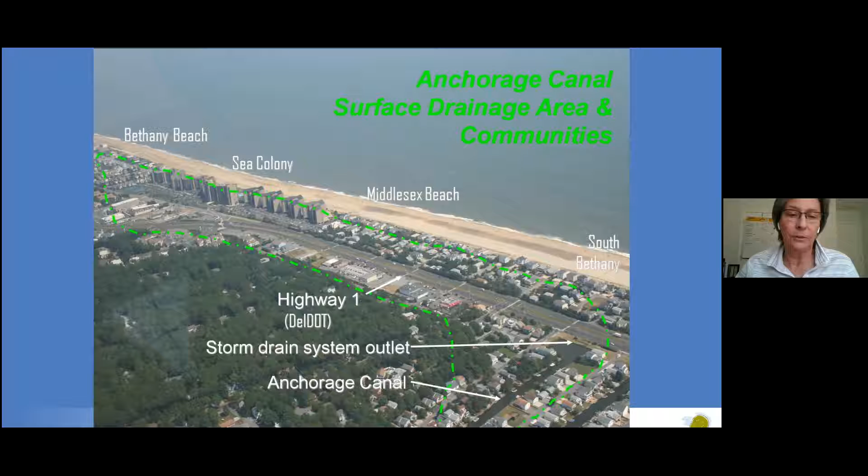This plan included concept designs, cost estimates, nutrient load reductions, and so forth for a variety of different projects all along the highway and within the community in that drainage area. It included things like wet swales along the sides of the highways, infiltration basins in some of the parking areas, bioretention facilities in the medians and along some of the other right-of-way areas.

We started implementing this plan with our partners in 2011. The plan was completed in 2010, and we started applying for grants right away to do the project. From 2011 through this year, 2020, we have managed to implement all of these projects. This was really our first great success in doing this planning, and it was successful because we had proposal-ready projects that could easily be peeled out of the document and put into a funding application.

We could easily peel out portions of the project that fit the funding level that we were applying for. DelDOT was a really important partner in all of this, not only in developing the plan, but definitely in implementing the projects along the state right-of-way.

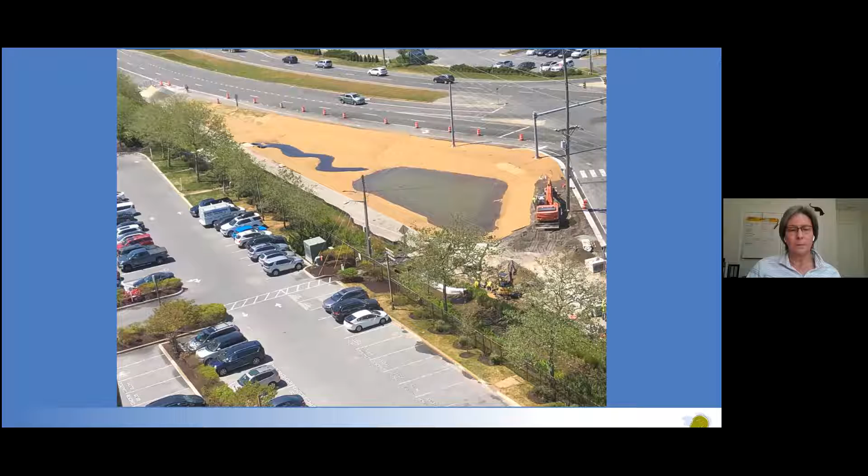The next plan I wanted to talk about is the Living Shoreline Siting and Concept Plan. This was done with Doug Janiec, Sovereign Consulting. Our goal was to select 6 living shoreline demonstration project sites. We used a multi-tiered geospatial screening that Doug developed, with a lot of stakeholder input. We did field visits to some of the top candidate sites, and then Doug helped us develop conceptual plans with cost estimates for 6 sites.

One of the lessons we learned here is that we really had to get upfront commitment from our private landowners. Some of these projects that we planned have not come to fruition because we didn't get that commitment right away. It's always been a sticking point with projects on private land, but we really learned our lesson in this one.

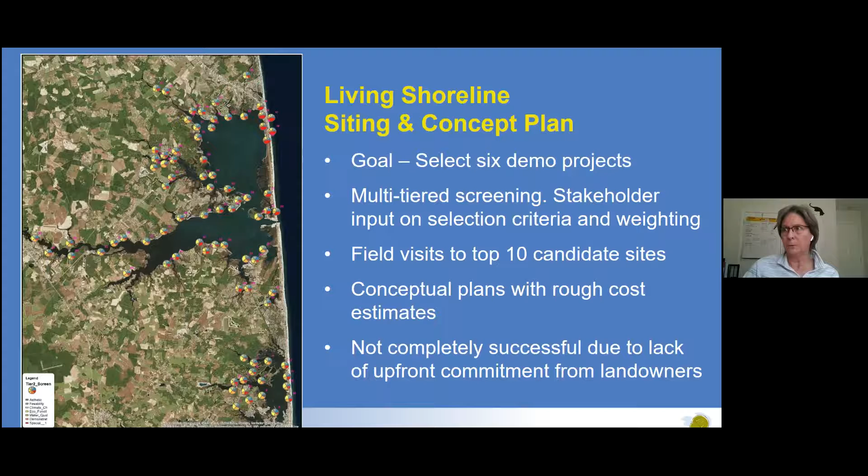Next was a stormwater master plan for the town of Dewey Beach. It's a highly vulnerable area in our watershed, a very low-lying barrier island with a lot of problems with flooding and shoreline erosion. So we helped the town develop a green infrastructure stormwater master plan that identified over 40 BMPs that were prioritized, including not only stormwater BMPs but also living shoreline projects. Again, we had concept designs, cost estimates, and environmental benefits laid out, and we had great commitment from the town on this.

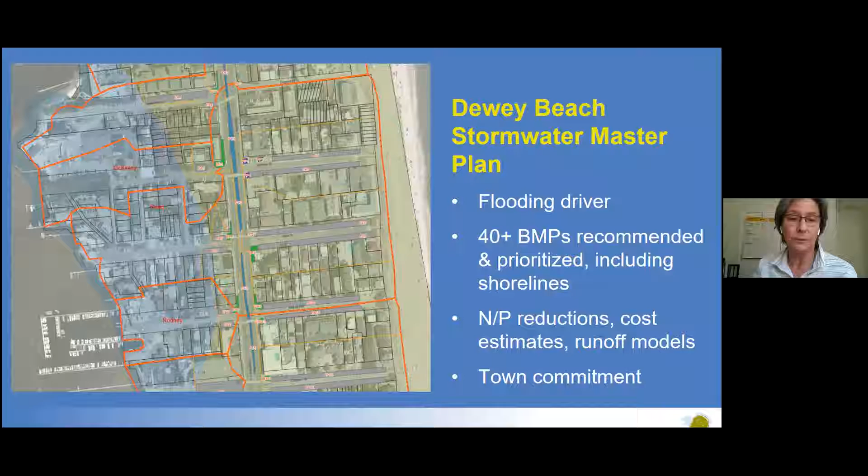This was also integrated with a planning exercise that DelDOT had grant funding for, and RK&K and Sovereign participated in this. So this helped facilitate the implementation of some of the projects in that master plan.

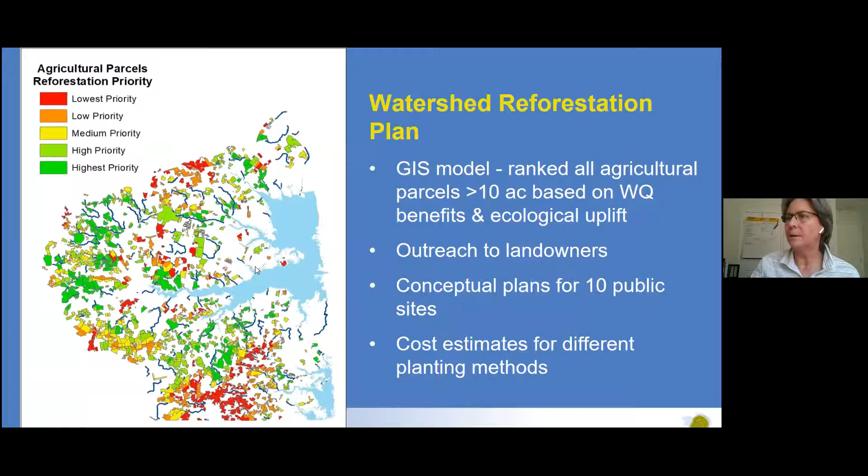I'm going to talk about this one more in my next talk, so I'm not going to spend any time on it here. This was a watershed reforestation plan that we did. I'll say more about that in a bit.

The last one I wanted to mention is a shellfish enhancement plan that we've done for the inland bays. We have very low densities of wild oyster populations in our bays, although natural recruitment does seem to be increasing recently. We have a burgeoning aquaculture industry now, just in the beginning phases. But recognizing the ecological benefits of a healthy oyster population, our goal is to increase the wild native oysters in the inland bays and provide sustainable reefs for them.

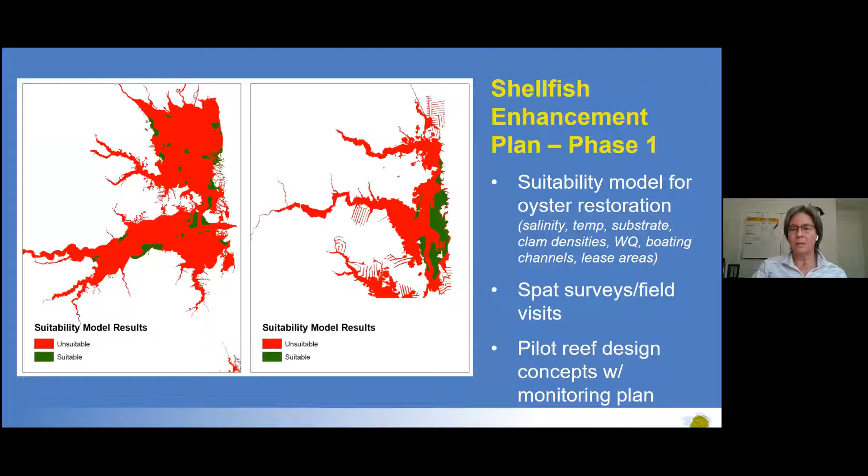So we've done this in 2 phases. The first phase did a geospatial suitability model for oyster restoration that combined a number of physical, biological, and regulatory factors to assess the suitability of all the areas within the bays for oyster reef projects. Then we started to implement some pilot projects, very small reefs that we could monitor and do research on to see what worked well, what kinds of tactics worked best in our bays, and what kinds of issues we would run up against. To date, we've implemented 3 pilot subtidal reefs, and we are currently designing and getting ready to implement some intertidal reefs as well.

One of the lessons we learned here is that although we try to do science-driven planning approaches, sometimes our planning isn't just about science, because there are lots of user conflict issues, regulatory issues, and so forth that have gone into this plan that we really have to address in future phases of the planning. Continual communication, not just in the planning effort but also about the results of some of our studies, has been really key to moving this process along.

These are some plans that we're currently using, our lessons learned, to develop at the moment. Not going to discuss these in any detail, but we definitely have a great process that we've developed for doing these planning exercises, much more efficient now.

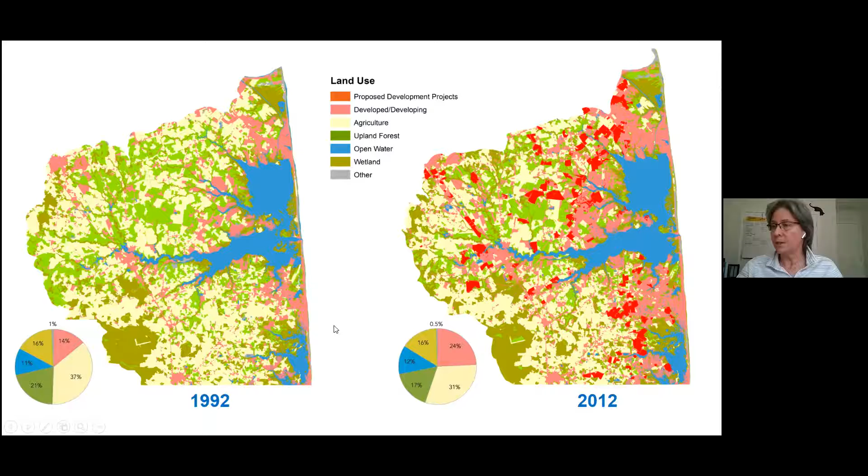So this project that I'm going to talk about is from a reforestation planning effort that we conducted in 2017, I believe. The driver behind this is that how we use the land directly affects the water quality in our bays, because various land uses produce different types and amounts of pollutants. In our watershed, agriculture, shown in the yellow areas here, is definitely the largest land use, although it is shrinking, and it's a major source of pollution to our bays.

So our last State of the Bays report, issued in 2016, we're currently updating, with a new report coming out in the fall, but I don't have the most recent data. This is data from the 2016 report, and it showed that between 1992 and 2012, developed lands in our watershed increased by 34 square miles, our agricultural land was down by over 18 square miles, and our upland forests were down by 14 square miles. So the trend in our watershed is more development and loss of forests and critical wildlife habitat, and all indicators are that this trend is continuing and will continue.

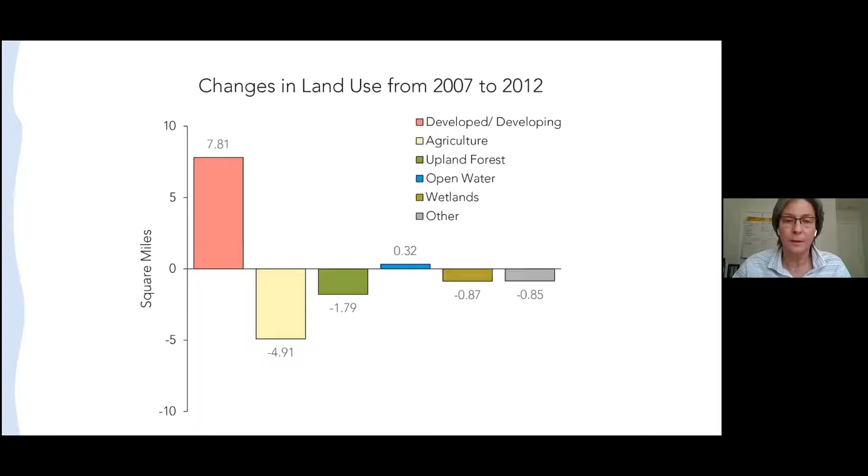So another issue that we deal with in our watershed is lack of protection and restoration efforts to counter these losses. Natural habitats support a diversity of plants and animals, and some of them are rare or becoming scarce, and these habitats are being rapidly lost or fragmented due to changes in land use in the watershed.

So we did an assessment of protection and restoration in the watershed, and found that progress on protection of natural areas has nearly stalled and slowed, and almost all of the progress that was made was before 2010. This is largely due to reductions in funding for public conservation efforts, and our watershed development is really driving land values sky high, so purchasing land for easements and so forth has become difficult.

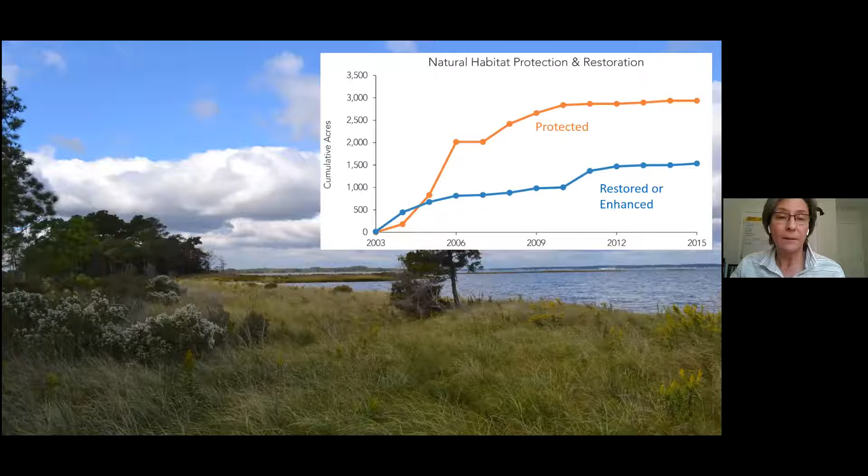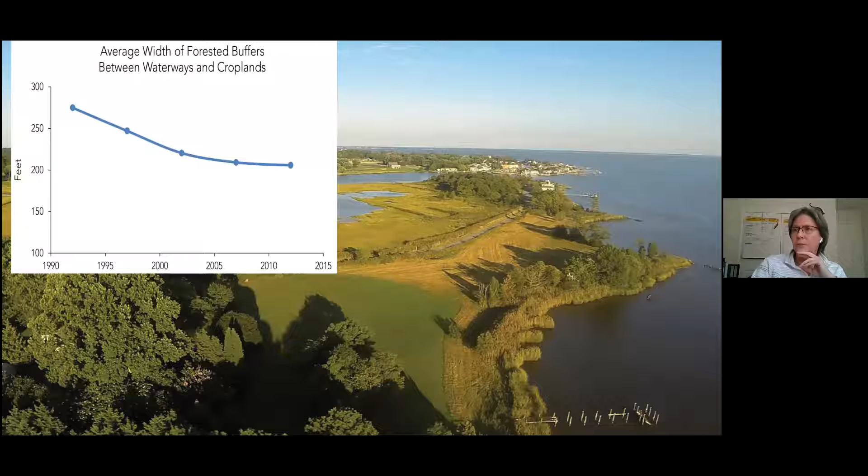Buffers of natural vegetation can intercept and remove pollutants, and they vary in effectiveness with width and type of vegetation. So we did an assessment for the last State of the Bays report of the width of forested buffers between agricultural land and our waterways. We've definitely seen a decline over the years in buffers that are 50 feet or more in width. So that is an issue.

Wildlife habitat fragmentation and loss of habitat for key wildlife species is also a key issue for us. So reforestation has become a major initiative for the Center for the Inland Bays. We're working with a variety of partners on acquisition of land and easements to do various types of restoration projects, but we're really focusing on reforestation. So these are some of our priorities: protect habitat, restore habitat, expand forested buffers to deal with pollution going into the bays, ultimately improve water quality, and connect fragmented habitats to develop more interior forest.

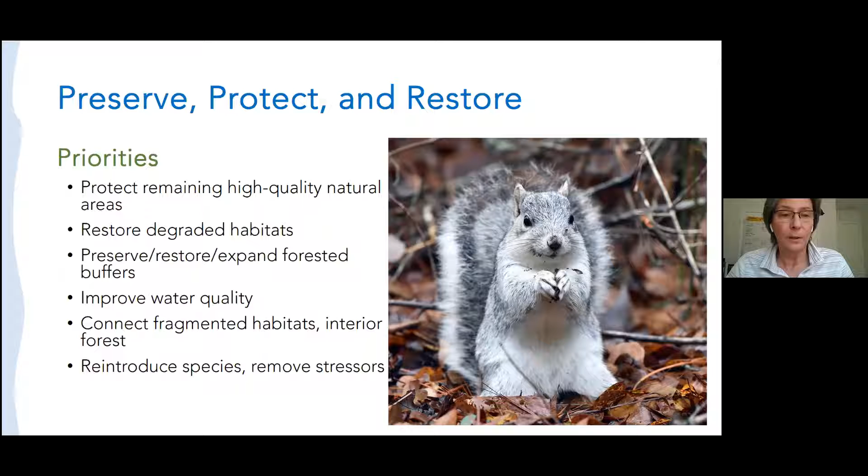So we did this watershed reforestation planning as a geospatial exercise and then outreach to landowners. Reforestation as a green infrastructure practice is actually one of the most cost-effective strategies to achieve nutrient load reductions, especially on agricultural lands, because converting cropland to a green infrastructure practice such as reforestation or wetlands results in the highest nutrient reductions for the cost in the long term. You're taking things out of fertilization and replacing them with natural vegetation.

So we partnered with the Sussex Conservation District to identify and conceptualize projects that provide water quality benefits and improve wildlife habitat. We had a geospatial model that used multiple environmental parameters to rank all agricultural parcels within the watershed that were greater than 10 acres in size.

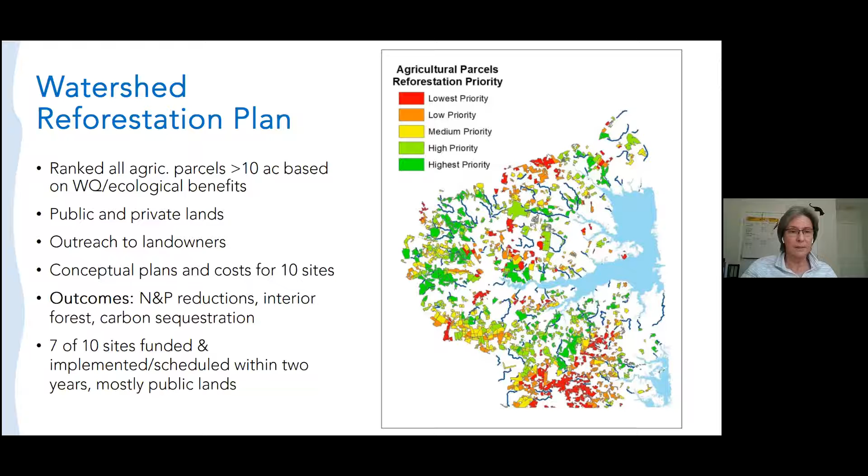Once we had these priorities established, we did outreach with the district to public and private landowners, and identified 10 parcels where we had some agreement on top priority and commitments from landowners. We developed concept plans for the planting and enumerated the outcomes—nutrient reductions, carbon sequestration, and so forth—and began working with partners to implement it. As of now, we've implemented 7 of the 10 sites in the plan, either completed the implementation or have it scheduled.

I'm going to skip over this because I think it's a little bit of a repeat of the next slide. So I wanted to switch to talking about this one specific project, Burbage Road.

This is a county-owned parcel that's been leased for agriculture over the years, but the county agreed in 2018 to take the parcel out of production and make it available for reforestation. The county's been a great partner in this reforestation effort—we've done projects on several county-owned parcels, and they're making more parcels available to us. We're going to be working with them to reforest most of the 400-acre Wolfe Neck wastewater treatment plant, turning that from agricultural spray irrigation to silviculture. The county's interest is partly in developing a nutrient credit banking system with the state, so they get additional benefit from this.

So the Burbage Road project is a 20-acre parcel. It drains directly to the Indian River Bay via, I think, Blackwater Creek.

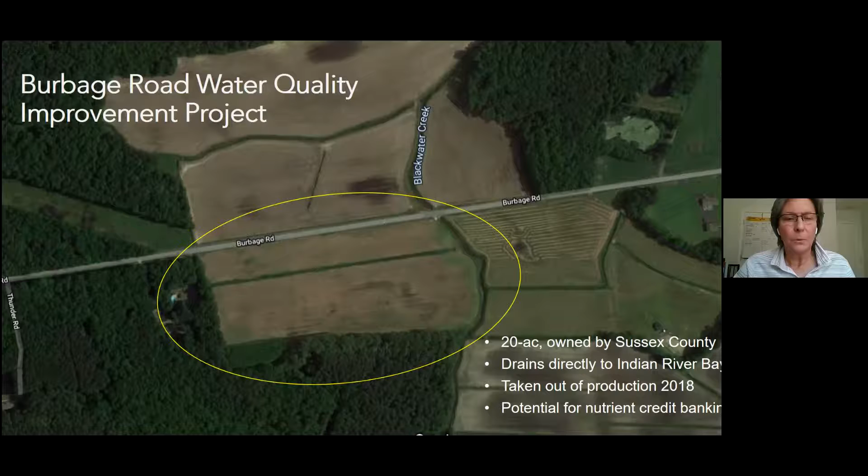Here's a picture of the project after it was implemented. As I said, Sussex County owns the project. The Conservation District helped with a lot of the earthwork involved, and Environmental Concern helped us with some wetland design. The objectives were to take those 20 acres out of production—there was a large drainage ditch going right through the center of the project that we decided would make a great wetland restoration. The Sussex Conservation District helped design and construct it, converting it to a 1.8-acre treatment wetland. Then 7 acres of the property were planted with 3,000 native trees.

Here's an aerial view of it. This is the drainage ditch that went through the parcel, and the wetlands were created back here next to the woods and along the drainage area. Much of the rest of it was planted for reforestation, and all of it drains to this ditch here on the right-hand side.

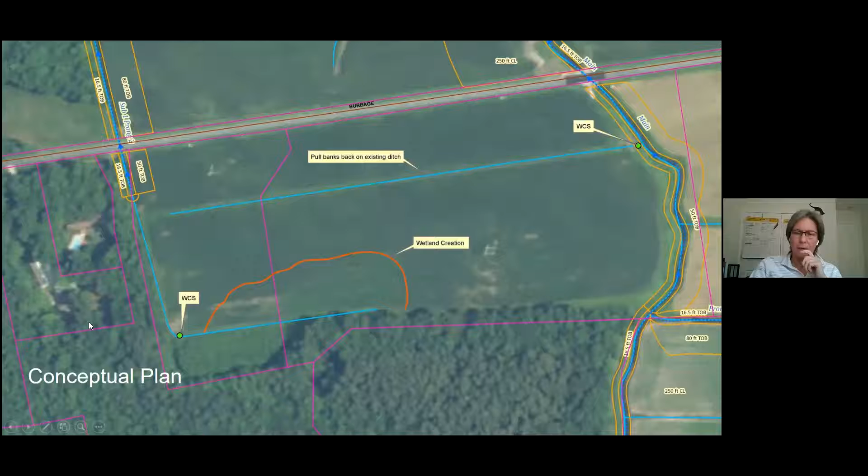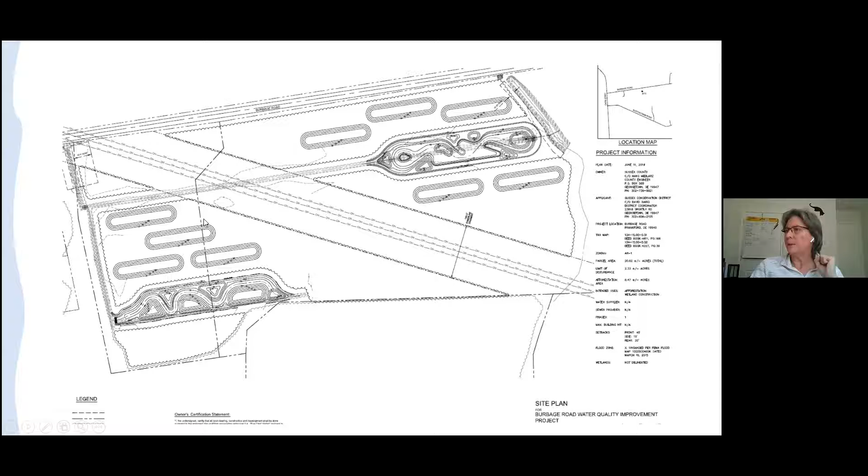So this was the final design of the wetland creation that was done by the Conservation District. The drainage ditch was converted to a wetland with complex habitat in it. There's a water control structure here, and there was another wetland in the back area of the project as well. These other ovals are berms that were created to add topography to the parcel, using material that was removed from the wetland areas.

One of the issues we had with this was a fairly large infestation of Phragmites in the entire drainage ditch that went through this property. So even though we were able to construct the treatment wetland, we felt we weren't going to be successful planting it until we had that frag under control. We spent two seasons heavily controlling the Phragmites there, and we finally feel we have it under control sufficiently to do the wetland planting.

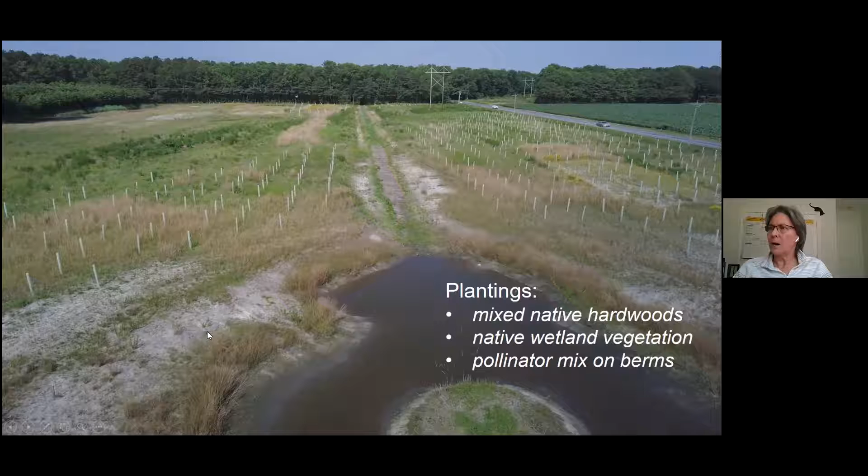So that planting is actually going to occur this spring. We're going to try to engage volunteers if COVID allows us to do the planting. We were able to go in after the wetland was constructed and plant the trees. This was done with a contractor, and it was a mix of native species, both hardwoods and mostly hardwoods, oaks and so forth, a few evergreen trees. We'll be putting native wetland vegetation in the wet areas, and these berms have been planted with pollinator seed mixes as well, native ones.

Marianne, about 2 minutes. Okay, I'm almost done.

A key component of this project, and all of our reforestation projects, is monitoring and maintenance. We feel it's key to assess the success of each project because it has an impact on future planning. We have some big issues in our watershed with deer browse. We've had a couple of projects that were largely unsuccessful because almost all of the trees were eaten by deer fairly quickly, and we're trying to test various approaches to minimizing that deer browse and accommodating for it.

We want to know which species of trees survive best, what percent survival we get on typical projects, and how we can improve that. And what is the long-term biodiversity that we create? How successful are we, not only in the first few years, but also 5 years, 10 years, 15 years from now?

We're actually developing a citizen science program right now. This spring will be the first pilot of it. We're going to train people to identify some of the tree seedlings that were planted on the project and to help us do the monitoring and provide the data. It should be a very cost-effective way of gathering this information.

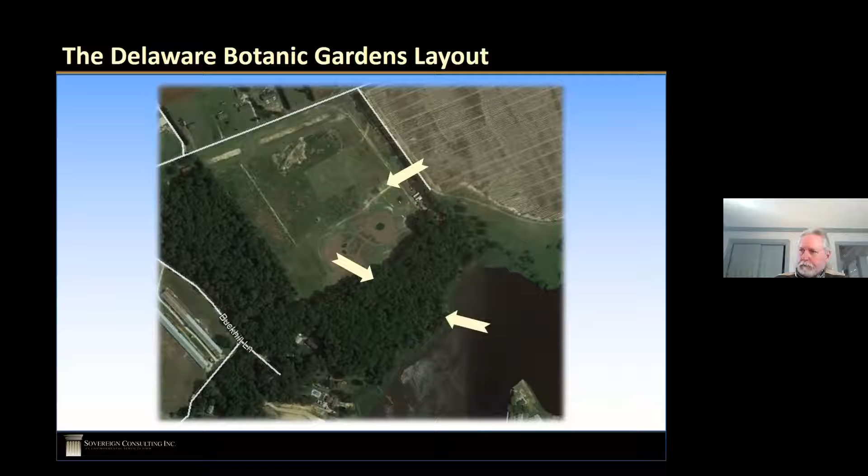As you can see, this is a unique destination filled with a lot of character, including features such as 7 to 10 foot wide bird nests that are made from waste material during a path clearing.

The purpose of the project is to provide a nature-based unconventional living shoreline demonstration project which provides protection to the shoreline, provides significant water quality and ecological uplift, utilizes material from the property to the greatest extent possible, and is designed to reflect the personality of the gardens.

This project addressed nearly 500 linear feet along the shoreline of the project site.

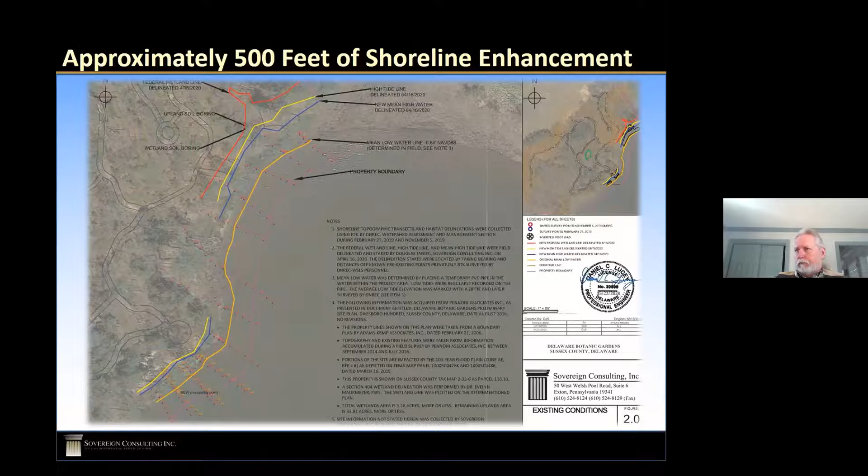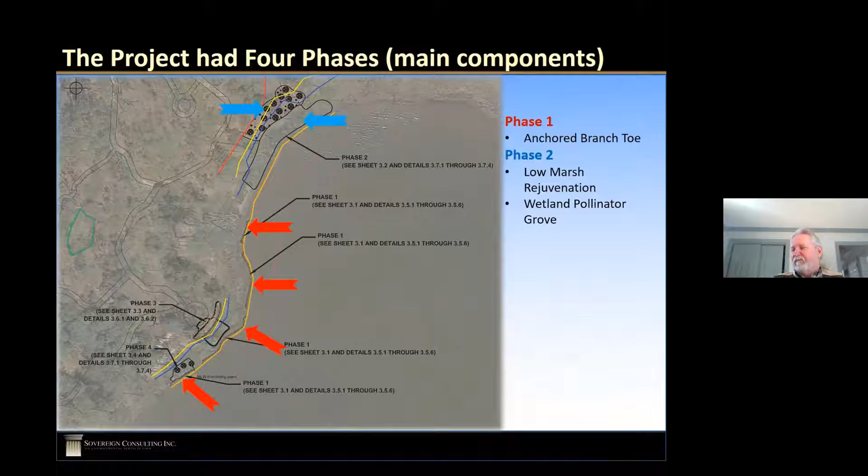The project had 4 phases, i.e. main components. The first phase was anchored branch toe. The second phase was low marsh rejuvenation and wetland pollinator grove. The third phase was low marsh rejuvenation and riparian understory establishment. And the fourth phase was more low marsh rejuvenation.

The first phase was the anchored branch toe. It was made exclusively from waste materials from the site. The brown line you see showing up on this diagram represents the approximate location of the toe.

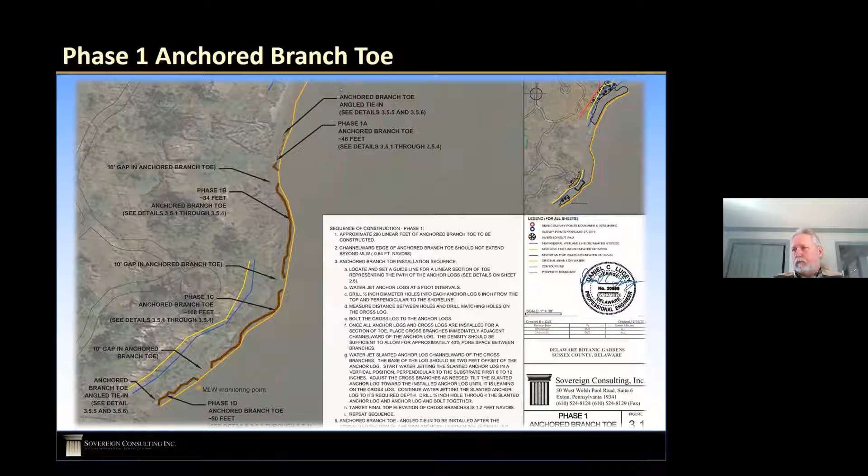The anchored branch toe is made up of anchor sets spaced 5 feet apart. Each anchor set is made up of 2 jetted-in pieces of timber that are bolted together. Each timber is jetted in 3.5 to 4 feet. The exposed portion of the timber is only going to be between 18 and 20 inches.

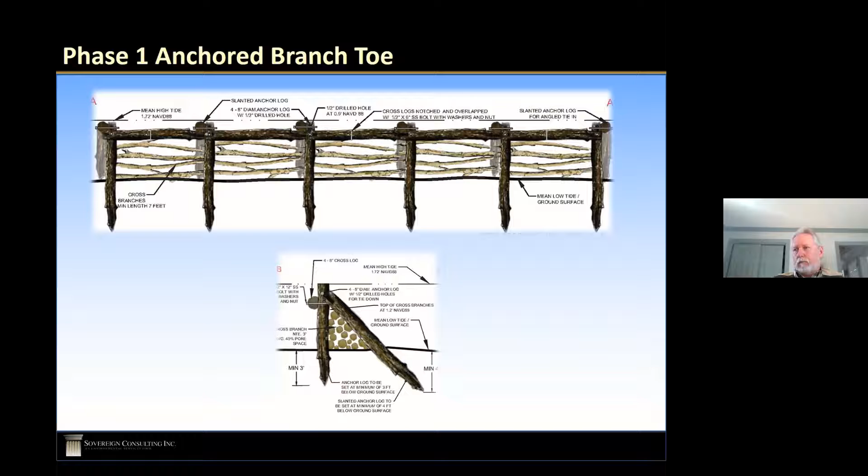We first installed the vertical portions of each set, and we linked them together with bolts and cross timbers. We then install the slanted portions of the sets, and in doing so, we're trapping the cross branches into the anchor system.

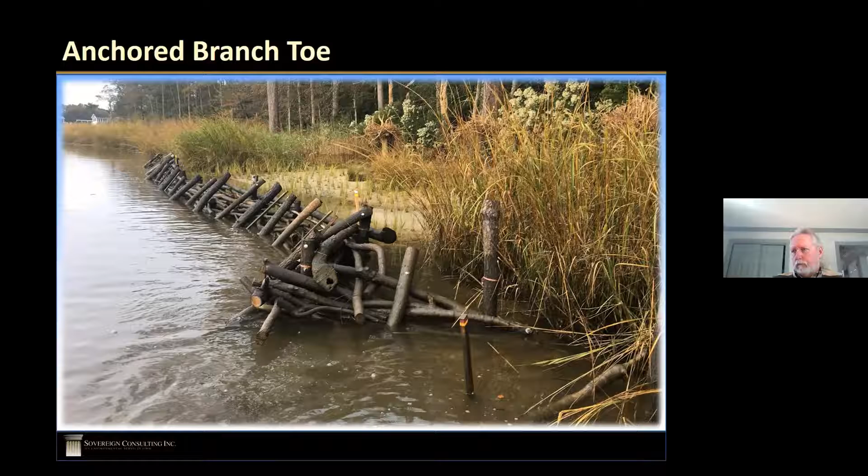This section is nearly completed, but the idea is that the existing marsh will grow into this, and this wooded area will be part of the marsh edge. Any areas not vegetated landward of this toe will be planted and revegetated.

Phase 2 involves a low marsh rejuvenation and a wetland pollinator grove. Low marsh rejuvenation is primarily a little bit of lighting activity by trimming some branches and also some planting of plugs of low marsh species.

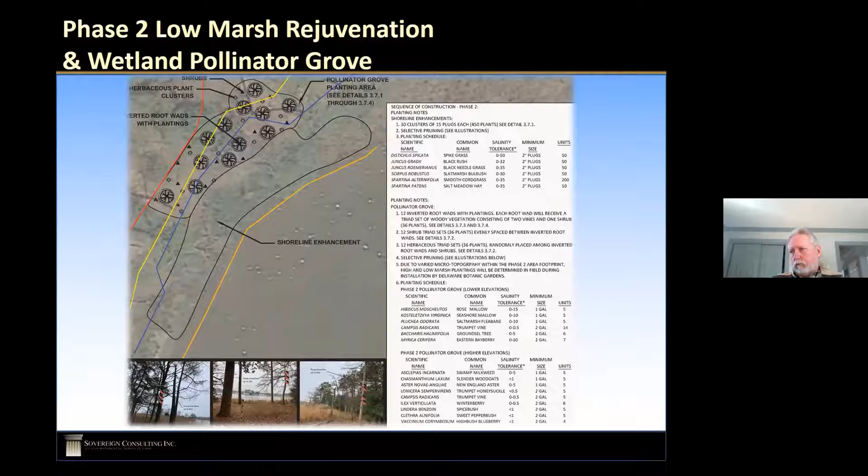The wetland pollinator grove provides a unique component to the project. Not only does it have your typical shrubs or herbaceous species which are selected to be pollinator friendly, it also has a stand of inverted root wads.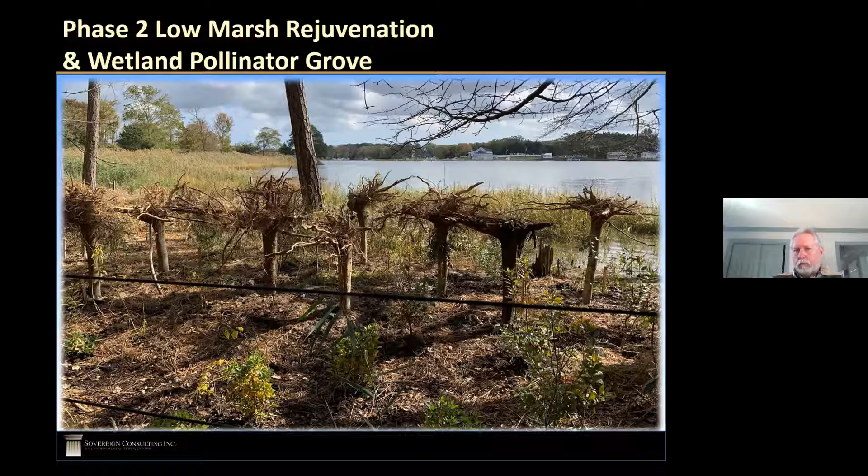These root wads will be populated with vines in the spring. They'll provide nesting sites, perching sites, and a unique habitat for the wildlife.

Phase 3 will involve a low marsh rejuvenation effort and a riparian understory establishment. It's actually a reestablishment.

The low marsh rejuvenation effort here involves selective pruning to lighten the site and to plant barren areas. Even Brian's getting his hands dirty on this one.

The riparian understory establishment first involves creating revetment in the style of the bird nest to hold back some soil that will be planted with vegetation.

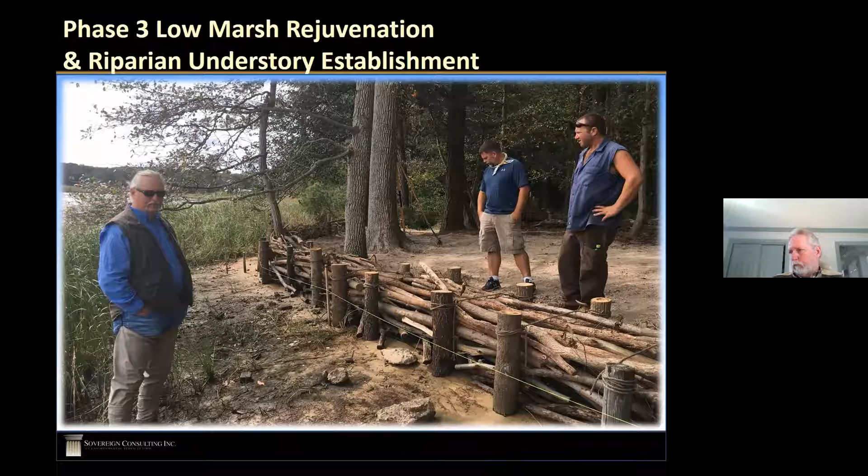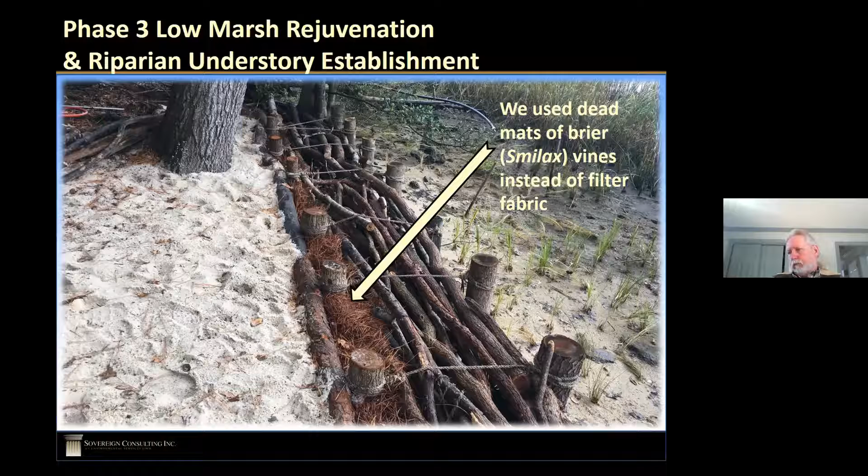In this photograph, you'll see the revetment that's been constructed. You'll see the backfill up to the top of the revetment, and there's a little bit of sand on top, but it's mostly topsoil. You'll see the plantings of low marsh on the right side of the revetment, and around the edge you see a bunch of vines that are packed between the soil and the revetment itself. These are basically mattresses of brier that was cleared during the path work, and we're using this instead of filter fabric.

Phase 4 is a low marsh rejuvenation. It's a little different from the other marsh work we've done on the site because this part has had more scour and is more exposed to energy, so we have to take a few extra steps here.

As you can see in this photograph, portions of the peat layer have been scoured away. Our goal is to raise the elevation up to match that peat level, which is where the marsh wants to grow, and then do traditional planting on top of that.

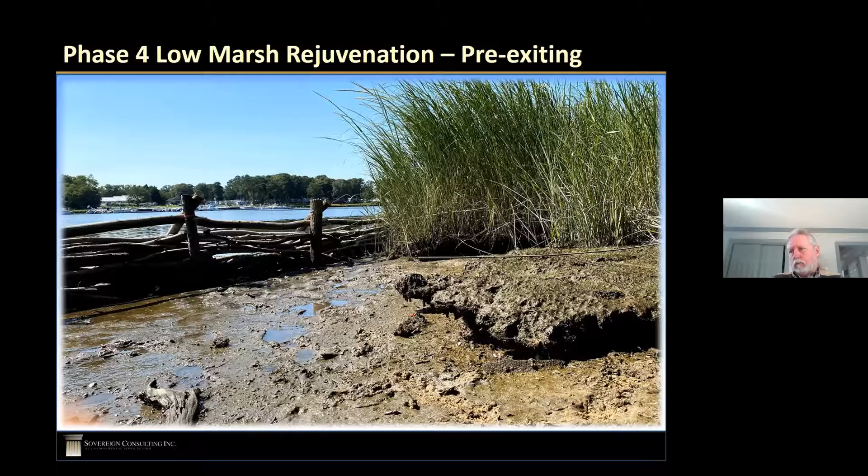I'd be remiss if I didn't mention all the volunteer support on this project. Huge amounts of the work were put in by volunteers, who worked very hard for a number of weeks to make this all happen. I'd like to thank them at this point in the talk.

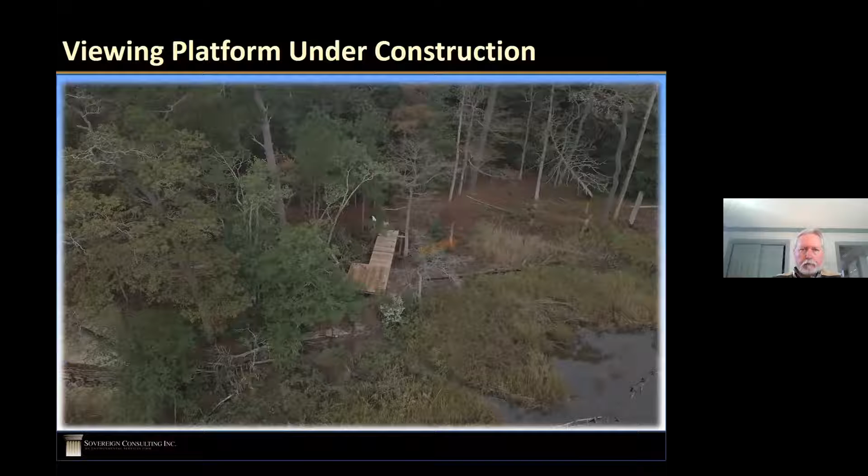Part of the garden's mission is outreach education. As part of the project, we incorporated a viewing platform. This is a picture of it under construction. The platform allows you to see along the woods edge, the marsh edge, as well as the creek.

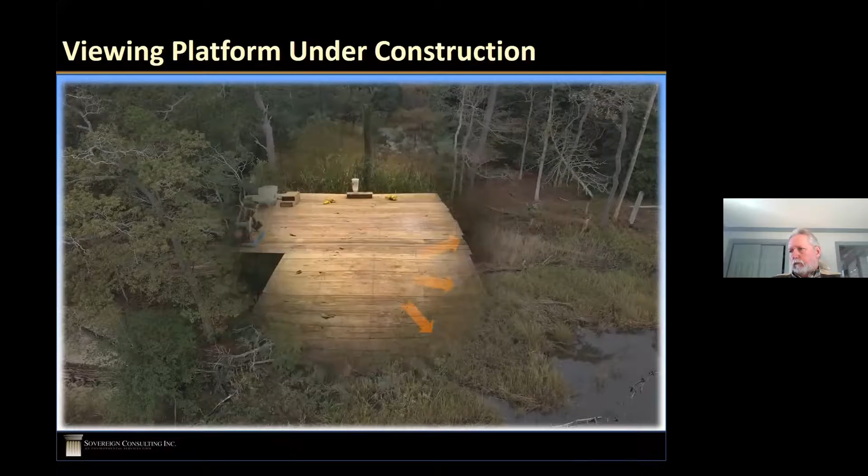This series of photos shows the platform during and after construction.

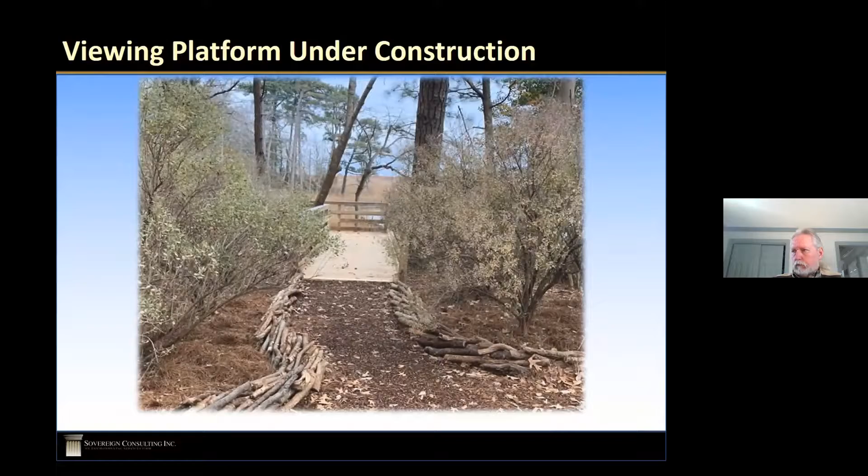Thanks a lot for your time, and I hope you enjoyed this presentation.

Thanks, Doug. Right on time, a little early, even. Yeah, getting caught up — you want to set up the other one for a minute here?

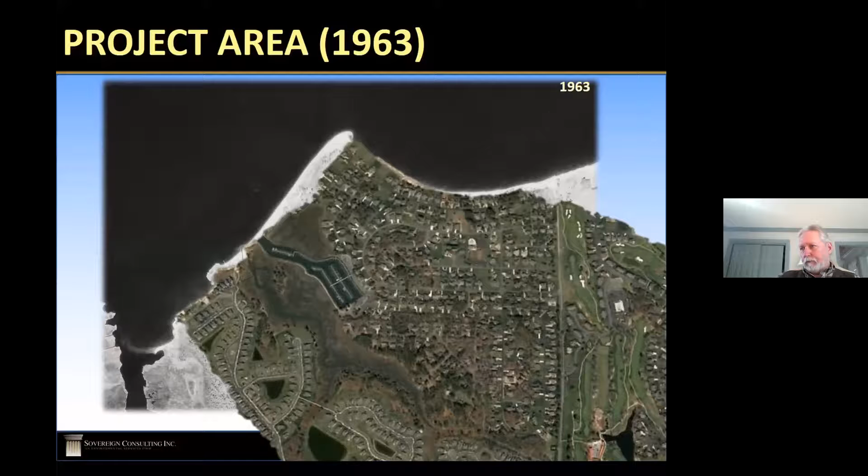The project can be divided into 2 main areas. The primary area, or beach area, had a breached sluice, degraded beach, and some back marsh that was impacted as well. The second area was primarily marsh with a stretch of beach, a community dock, and some out parcels.

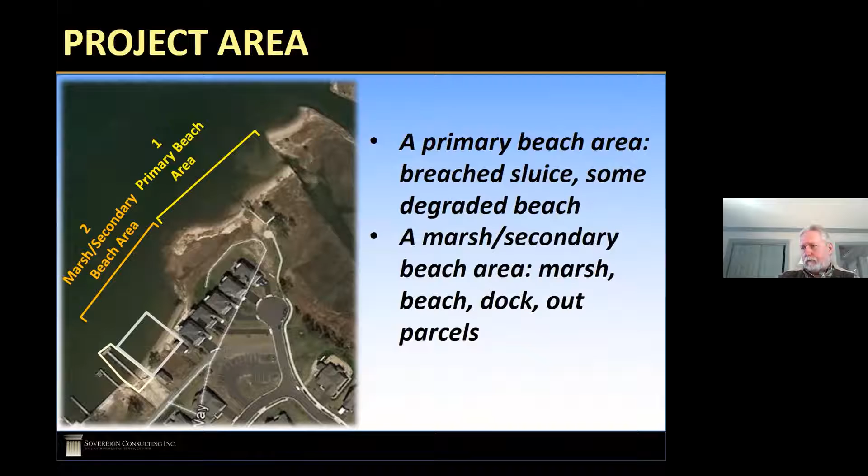Nor'easter storm directions play a big factor on this beach. Some parts of the beach are directly hit, while other parts have some protection from the sluice, where you have overwash and diffraction. This divides the erosion zone into 2 areas: a moderate erosion zone on one side, and where direct impact occurs, a much higher rate of erosion. The impact on the beach is clearly visible in this photograph, and it tells us where to focus some of our work.

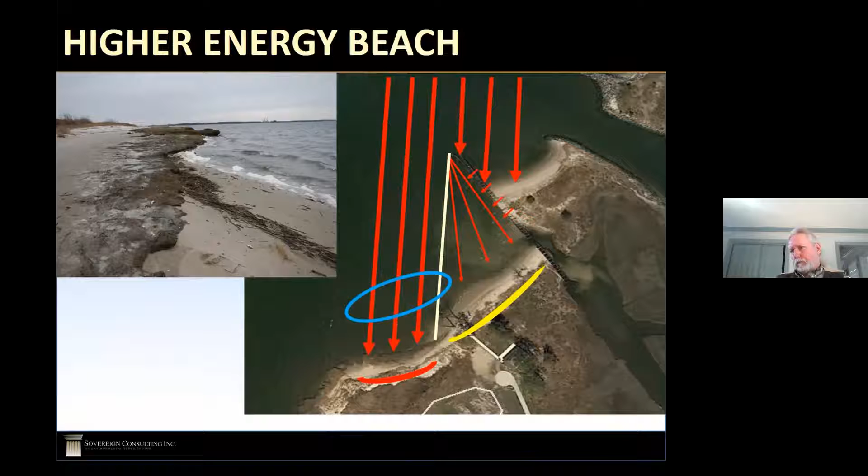We also get a lot of erosion from storms coming out of the northwest. These aren't as severe, but they're chronic in the fall and winter, and they can cause a great deal of damage. You can see in the shoreline all the toe cutting on the marshes from these storms, and also on the ground there's a lot of undercut.

To achieve this: stabilize the breach, direct channel flow away from the shoreline, convert the breach into a permanent marsh connection, and establish horizontal and vertical controls at that connection to allow for proper marsh flushing.

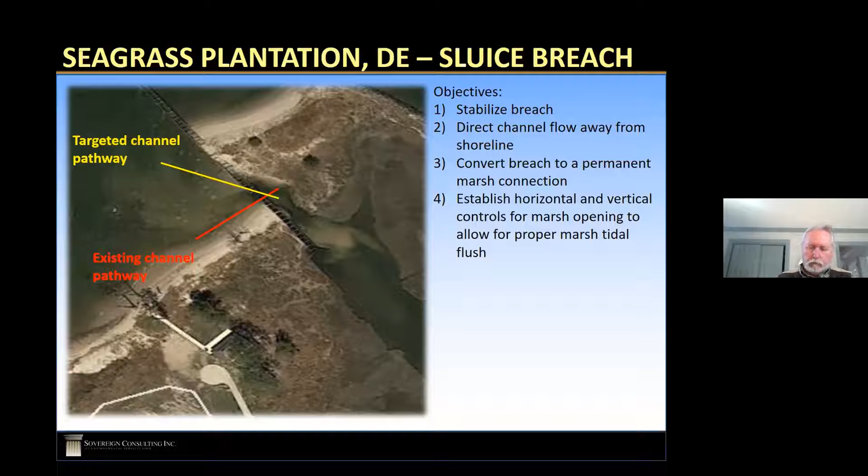Another component of this is that the portion of the sluice along the beach is also a safety hazard — it has a drop, and since children come to the beach, we wanted to eliminate that hazard. So we fully abandoned that part of the sluice by filling it in and planting it. The following slides will show this process of sluice abandonment as well as the correction of the breached area along the beach.

The next section of beach was a portion that was being highly eroded by direct exposure to nor'easters. The solution here was to keep the energy off the beach. The best way to do that was to create a nearshore reef that would dampen the wave before it hits the beach. The following slides show you the process that went into creating that nearshore reef.

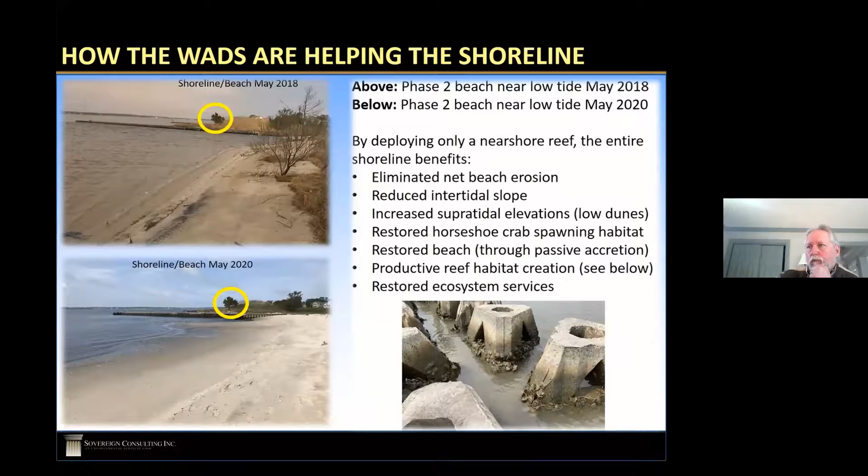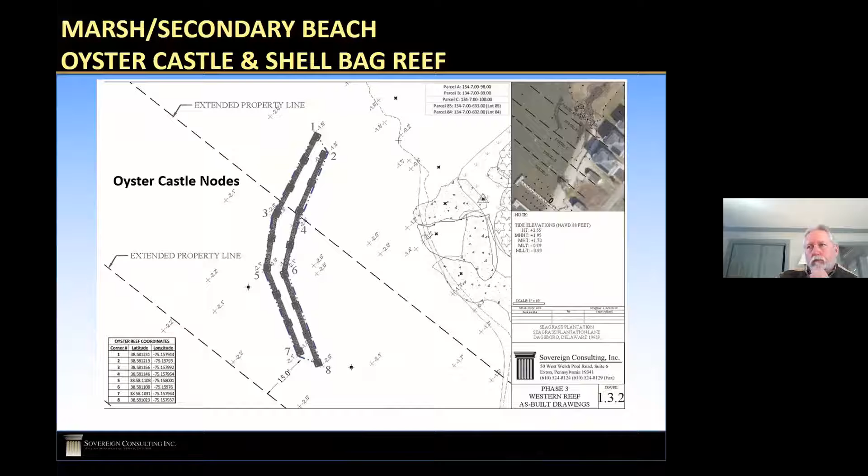The photographs in the next slide are going to show the process of creating that reef, including some innovative anchoring systems, and also show you the final result and how incredibly different it looks after this reef was installed 2 years later.

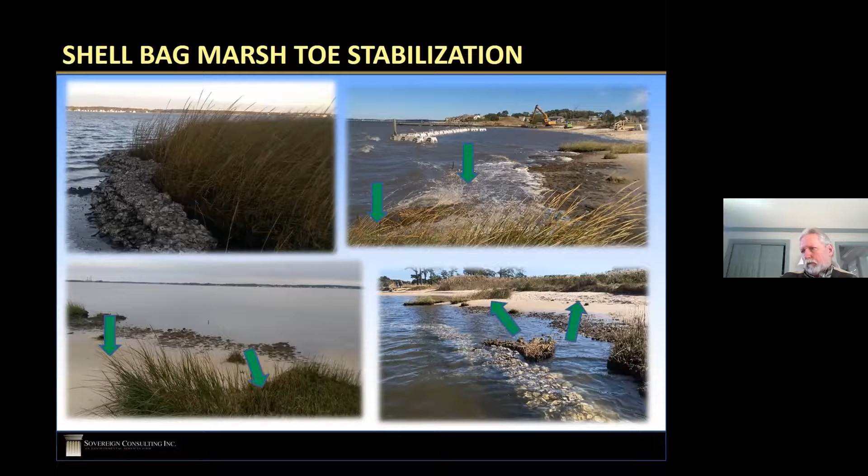No words are necessary for this part of the project, just see the pictures.

I hope you enjoyed this presentation. I hope you appreciate...

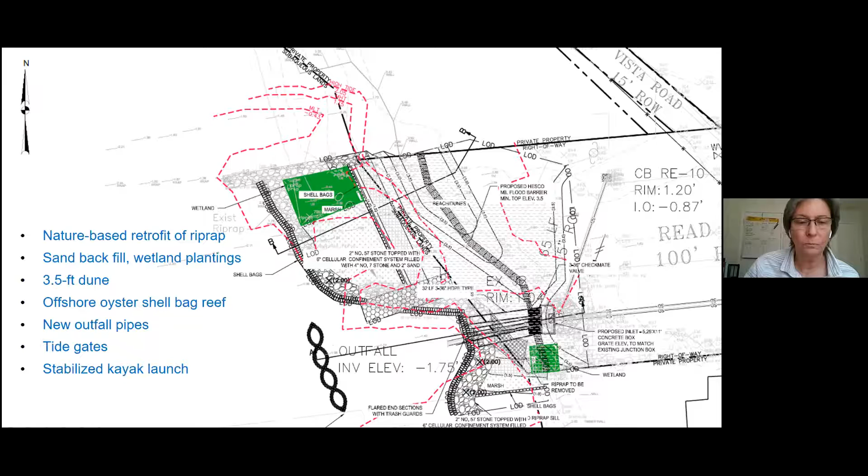So I'm going to show you a bunch of slides showing the progress of the construction and what these different components look like. One of the first things that went into the project was the offshore oyster reef.

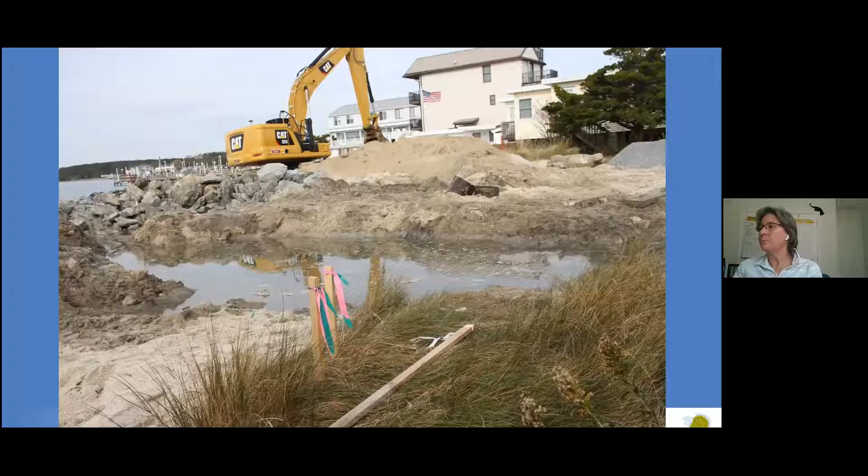You can see here some of the sand backfill being spread behind the new rock toe that was established for the living shoreline.

And that rock toe was also configured with oyster shell bags to provide additional complex habitat and a little bit more of a nature-based retrofit.

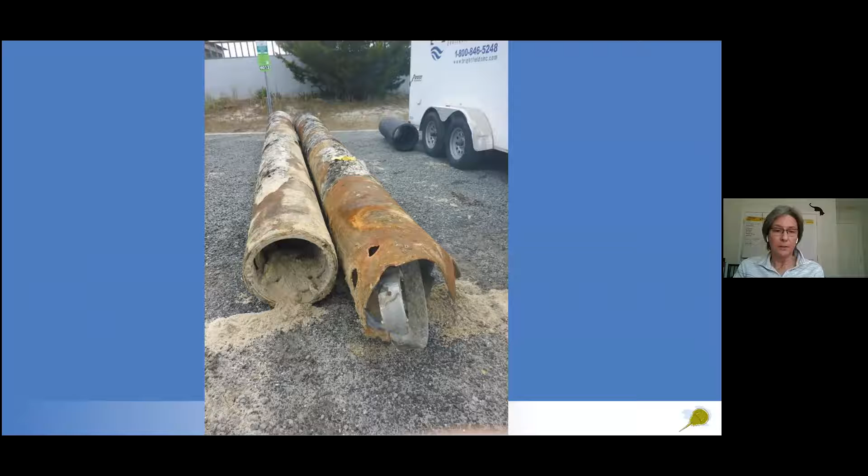The next component of the project was the replacement of some of the stormwater pipes and outfall structures that were there. This is the old pipes after they were pulled out. You can see that they were not in great shape. They were on the order of 50 or 60 years old, and they were basically not nearly functional for the amount of runoff that they were handling.

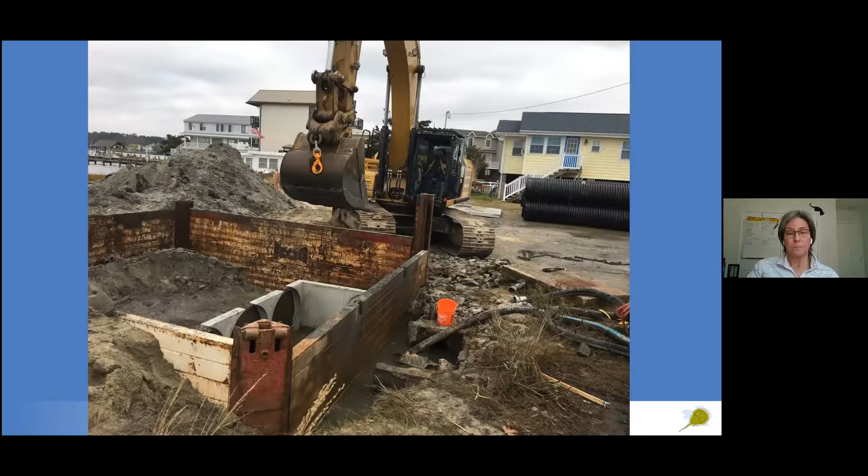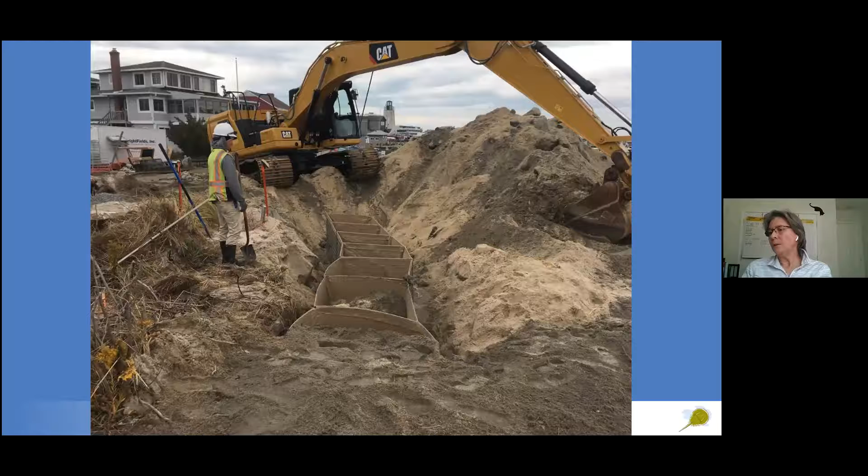This was a really interesting and innovative portion of the project. This was an idea conceived by Larry and Doug. We knew that we wanted to establish a low dune to help prevent some of the flooding during high tide periods and storms, but we needed a way to stabilize the spine of that dune so that when we get big storm impacts, even if the sand washes away, at least the flood barrier structure is still there and it can be restored very easily.

So they came up with the idea of using these things called HESCO flood barriers. If you're not familiar with them, they're basically four-sided boxes that have wire stabilization on the sides, a heavy-duty fabric inside, and then you can fill them with soil and plant them on top if you want to. I understand they're used often by the military for fast construction of structure in desert situations, and they've also been used after hurricanes to help prevent flooding or deal with flooding issues.

So we included a line of these HESCO flood barriers as the spine of a 3.5-foot high dune. Then sand was put inside of them and over top of them, and dune grasses were planted on top.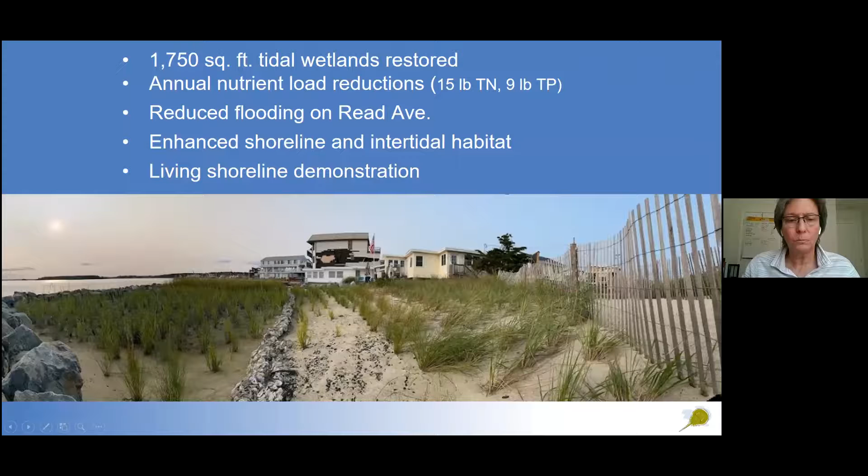So I just want to finish here by thanking all of the partners who helped with this. This was a multi-year project. It took a lot of money and a lot of cooperation to get this done, but we had a great partnership that we're continuing to mine for future projects in Dewey Beach.

We're currently looking at another public park there, Sunset Park, and some adjacent public and private shoreline areas to do additional integrated living shoreline and stormwater projects. So I think that is it. I'm happy to take questions.